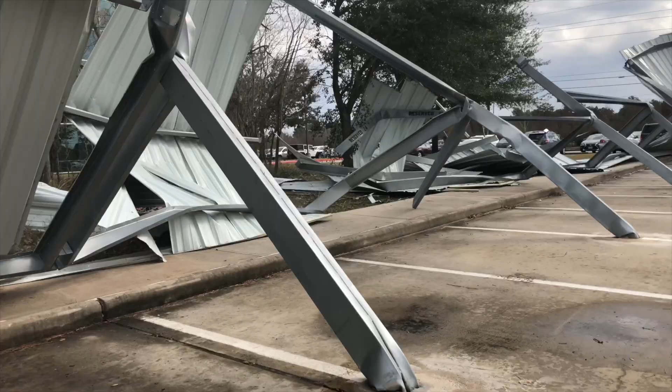Alright, so we had a storm here last night, and it blew a bunch of stuff out. So what we're gonna do is see if we can do an analysis on this and see how strong this wind was. Probably about 40-50 mile per hour winds got up underneath this thing and just blew off all that. But what we're gonna do is an analysis on this in GT STRUDL and figure out what happened. This is at our Hexagon Houston location.

Not the headquarters, but the Houston location. And so last night was a pretty bad storm. It'll be interesting to see how this works, and we can reevaluate this thing and analyze it and see what was going on and what was the purpose of it.

All right, so went outside, man, it's cold out there. That storm, I mean, you just saw that video, just blew that carport to smithereens, man. I wonder what we could have done better. I'm not an engineer, but I wonder what they could have done, or if some other software could have been used to design it better or engineer it better.

So let's go and ask the professionals, because I'm not a professional in any of this. Let's go see if we can find somebody in this Hexagon building that knows anything about that.

Let's say hi. Hi. Hello.

Yeah, so let's go find somebody. I know there's got to be somebody in here. Let me go down the hall here. Let me see what could have been done. I'm looking for a structural engineer who would know more about this. I know Ravi's got to be somewhere in here. There's Tyler, let's find somebody. I think that was Ravi. Yeah, let me see. That's his name up there, Ravi. Let me see if he's busy.

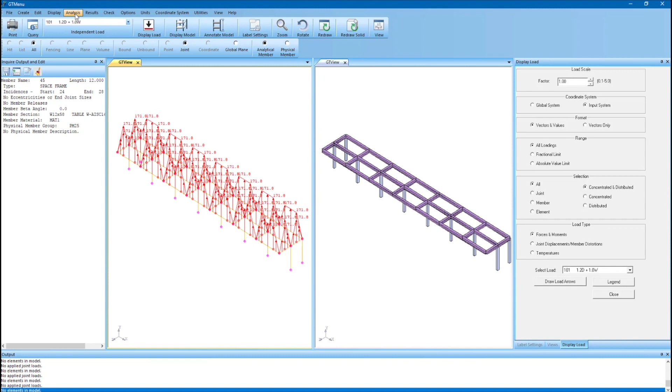And then what I did was run the analysis and look at the deformed shape of the structure. If you look at the deformed shape of this particular structure, you can see it resembles the type of failure that we see on site.

So I looked at these deflection numbers, and then I said, okay, let's put in these two columns here to have more redundancy in the structure. Then after that I ran the analysis again and looked at the deflection numbers, and they were better than before.

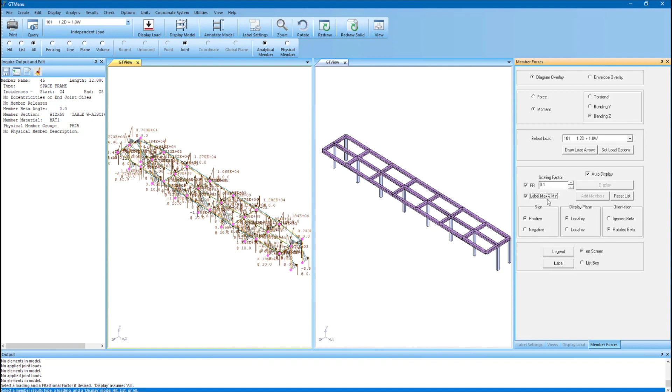And then I also looked at other things, like going into results and looking at force moment envelopes, moment diagrams about the z-axis for all members. You can see that the maximum bending moment for all these columns is right at the base, and that's the place where we saw the formation of the plastic hinges and where the beams and columns actually failed.

Now then what I did was run the nonlinear analysis. I satisfied all the requirements per the AISC 14th edition code, the analysis requirements, and then did a code check.

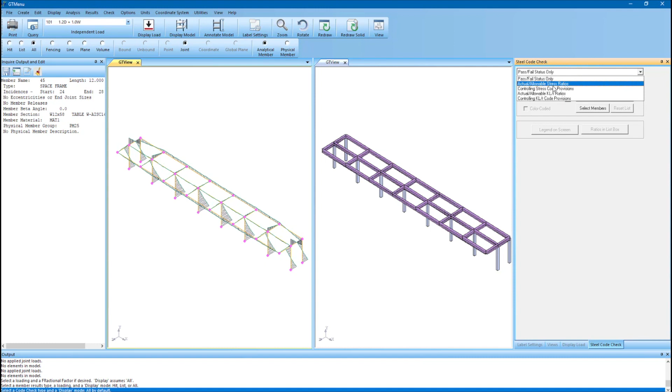Now if I go into results, steel code check, and go into allowable stresses, and just say select all members, you can see that all members are within, or less than, or about in the range of 1 to 1.1.

So this was based on the member selection that GT STRUDL did. I asked the program to come up with the shapes when I provided the loadings and the analysis results. We provided the forces going into the structure, it did the analysis, and now we know the moments and the displacements. Depending on that, it came up with these shapes, and we accepted them.

We ran the analysis again, and here are the results. So this is the final design. It picks up one type of section for all the columns. It knows that all columns need to be the same, and all beams need to be the same in this case.

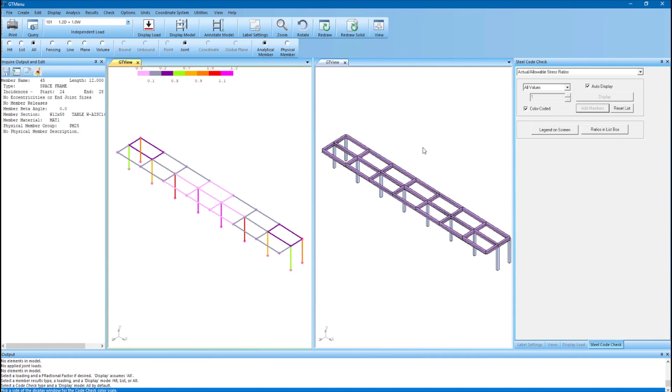And once this design has been finalized, you can take the physical model. So we have two options here, the analysis and the physical model. We can take this physical model into CADWorx Structure.

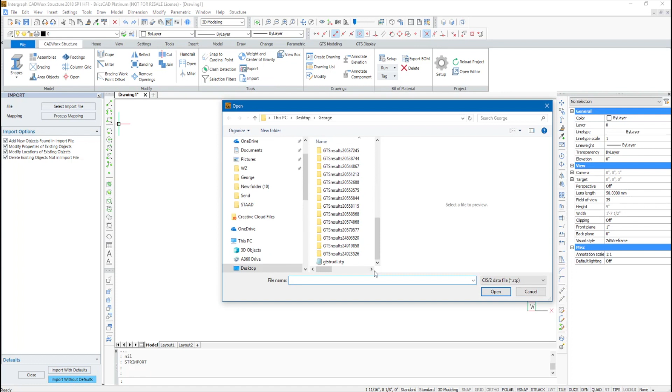Now here I have CADWorx Structure open, and what we need to do is click on this option called import, and you can select the import file here coming in from STRUDL. You can do a mapping on the sections if required. In this case, it was not able to recognize the 10 by 8 by 3/16, so I'm just going to go in and help it out with the mapping.

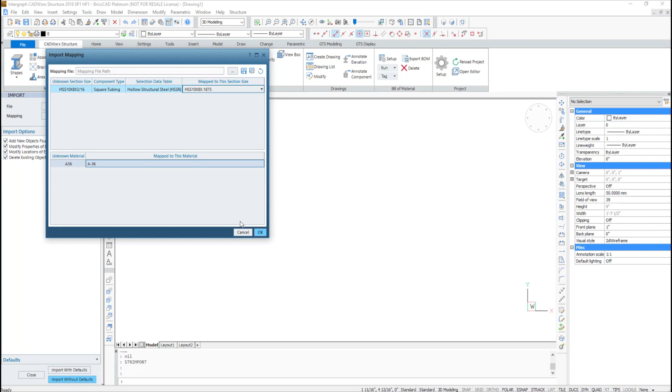So I'm just going to select square tubing, HSS section, and let's say we have a 10 by 8 by 3/16, so that would be 10 by 8 by 0.1875. If you click OK, it'll remember that for future use.

If you save that and click import, it actually comes into your drawing generation program. In this case, it happens to be CADWorx Structure, and this is running on the BricsCAD platform. So this is the structure.

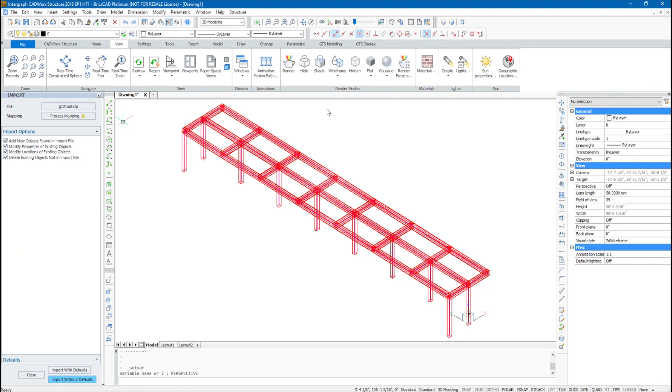We can also take a look at it in the perspective view, and I can basically issue a render command here to get a nice rendered view, that's how I would actually design it.

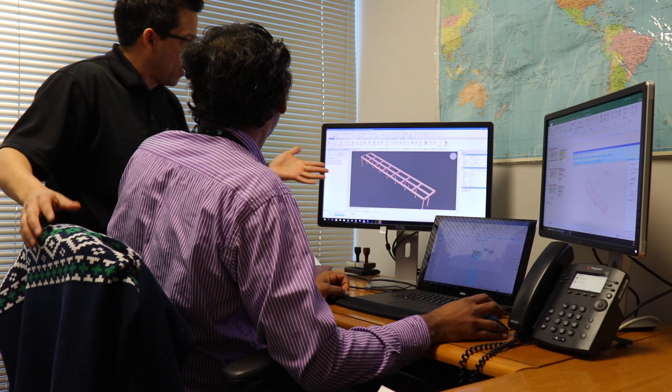So that's what you would have done. GT STRUDL, yes, you are amazing. Thank you, isn't this guy amazing? This guy's amazing, so let's end this. So GT STRUDL, really? Yes. I mean, how long did that take? That took an hour. An hour, yes. And then what, you just use GT STRUDL and CADWorx Structure to design? I mean, what are you basing that on? What's the... I mean, is this in BricsCAD or something? Yes, this is BricsCAD powered.

So both GT STRUDL and BricsCAD at the same time? Yes. Wow. So, in short, with the expectation of better performance of the structure, using better materials and a better structural system, and of course the best software, GT STRUDL and CADWorx Structure, I was able to design this structure in an hour. In an hour.

So what wind load can it handle now? As I said, 120 miles per hour wind. So this would be a great carport in Corpus, huh? Yes, Corpus Christi, you can have that on any of the LNG projects there. I've actually worked on one of those projects.

So with GT STRUDL, with CADWorx Structure, and on top of a BricsCAD platform. And BricsCAD, I guess it has dual processors too, it's multi-threaded. Wow, I've never seen a structural engineering program and BricsCAD like it, it's a modeler.

Yes, so you can model your way. Exactly. In this case I actually modeled it using GT Menu, but you could have modeled the entire structure inside BricsCAD and run the analysis in BricsCAD. You could have even reviewed the deflected shapes and done the drawing generation, like I did here, all inside BricsCAD. So there's multiple ways of designing.